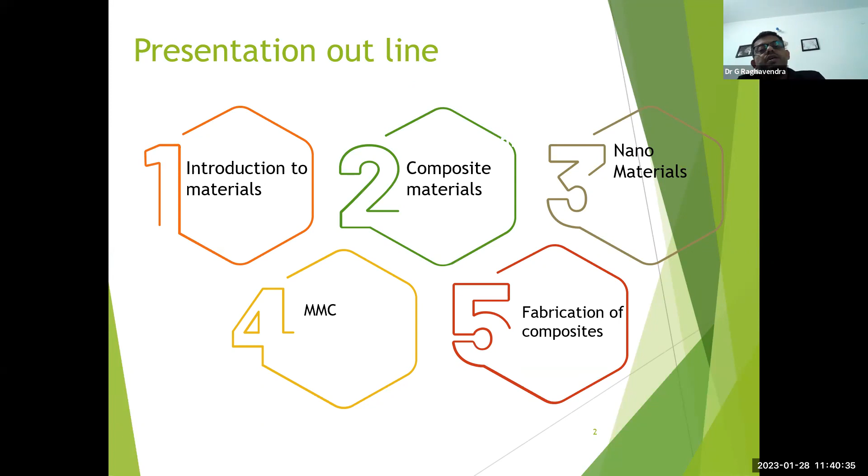So today's topic is about introduction to nanomaterials, nanometal matrix composites. My presentation outlines are: introduction to materials, first we'll talk about the different kinds of materials available, then composite materials, nanomaterials and MMCs - metal matrix composites - and the fabrications related to metal matrix composites.

So coming to materials, the classification starts with engineering materials. People learn or know more about engineering materials, but the basic classification starts with man-made materials and natural materials.

The materials which are available in nature are called natural materials, like stones, bones, skins, wood material, mud and clay materials. These are available in nature, so these materials are called natural materials.

The man-made materials, prepared by man, are polymers, ceramics and metals. From metals, we have alloys and refined ores and other materials. From polymers, we have plastics, thermosets, and thermoplastics, and some classification of polymers and elastomers. Ceramics also have sub-classifications, and metals have sub-classifications based upon alloys and combinations.

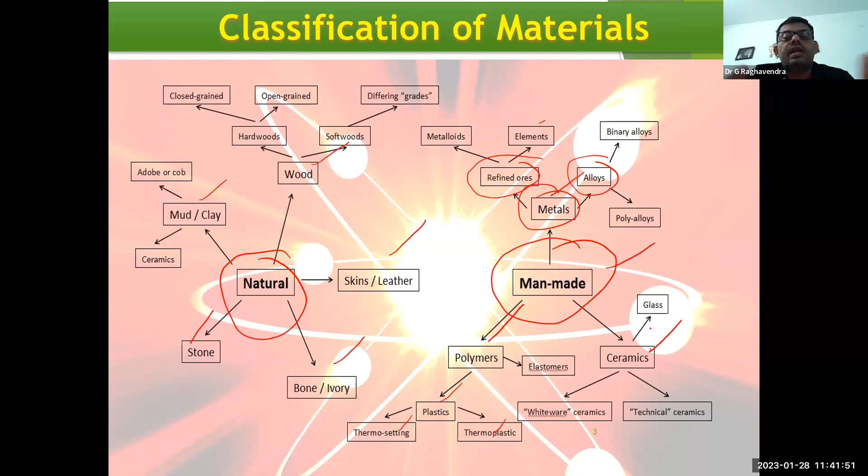So the basic classification of material starts with natural and man-made materials. Coming to engineering materials, which everyone already learned about, it consists of metals - ferrous and non-ferrous, amorphous - with sub-classifications. I'm not going deep into particular materials as our topic is about metal matrix. Quickly I'll complete this: plastics, thermoplastics, thermosets, elastomers, ceramics and others, and particularly composites.

The metals and plastics combinations, and metals and ceramic combinations, give you composites. The reinforced plastics, metal matrix and ceramic matrix, laminates and others. So this combination of metals and plastics, metals and ceramics, and plastics gives you a composite. These are about the engineering materials.

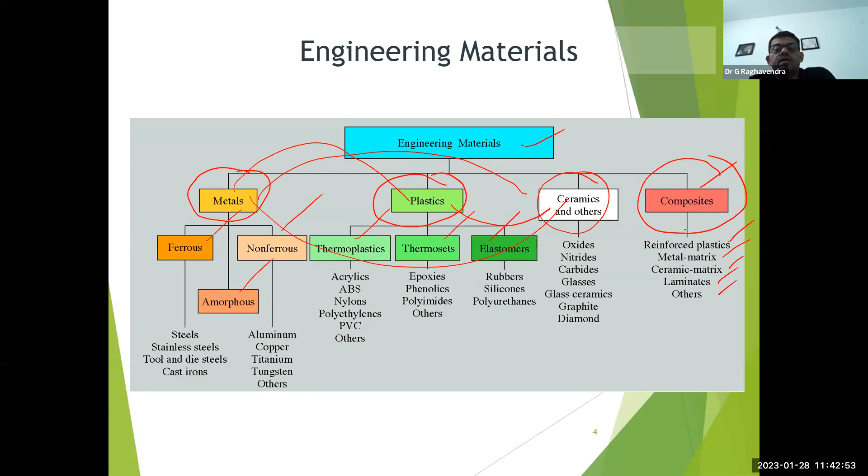There is an evolution of materials through the ages. If you see in the chart, from 10,000 BC, few materials started there, for example gold. From 10,000 BC we have gold, and from 5,000 BC we have copper, bronze, iron, cast iron and steels. You can see the metals flowing from 10,000 BC to the present trend.

So now we have metal matrix composites and advanced materials, functional materials, smart materials - all under metals. When it comes to polymers, from 10,000 BC we have wood, skins, fibers, and different kinds of glues. Now we have polymers like thermosets and thermoplastics.

From ancient times, these composites are not a new material - from ancient times we have them, but especially not metal matrix composites. In ancient times we had construction applications - people developed mud straw bricks and papers. So all those come under composites.

The evolution even from 10,000 BC shows we have composites. Those composites nowadays we more popularly call metal matrix, ceramic matrix, polymer matrix - so all those composites we have. From ancient times we have different kinds of ceramics for high temperature applications. This is the evolution of materials from 10,000 BC to the present trend.

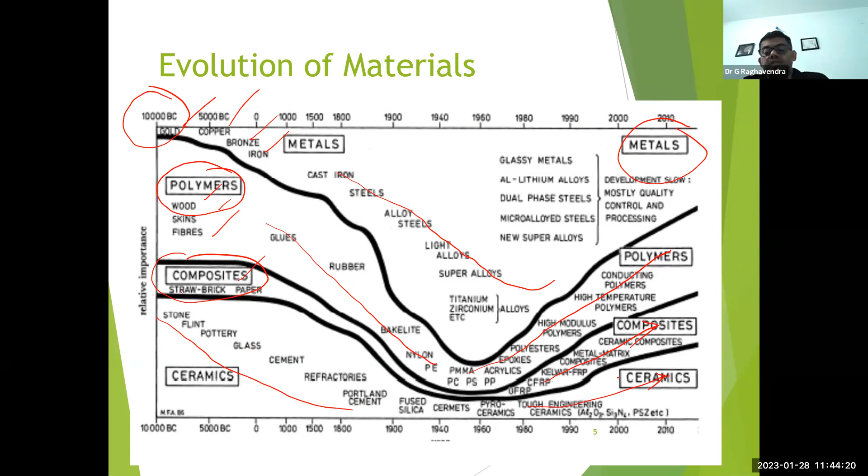Particularly, why do we need these composite materials? What are the needs for advancement, and why do we particularly need composite materials? We already have metals, already have polymers, already have ceramics. Why do we need to develop these composites by combining metals and ceramics, or metals and polymers, or polymers and ceramics? These are the reasons - we require strength.

Strengths are already available, but to enhance the strength of materials we need to go for composites. We need stiffness, toughness, corrosion resistance, wear resistance, and reduced weight. How to reduce it? For a material directly, we can't reduce the weight of the material - we can't straight away reduce the density of that material. By combining materials, we can reduce weight and increase fatigue life, thermal and electrical conductivities.

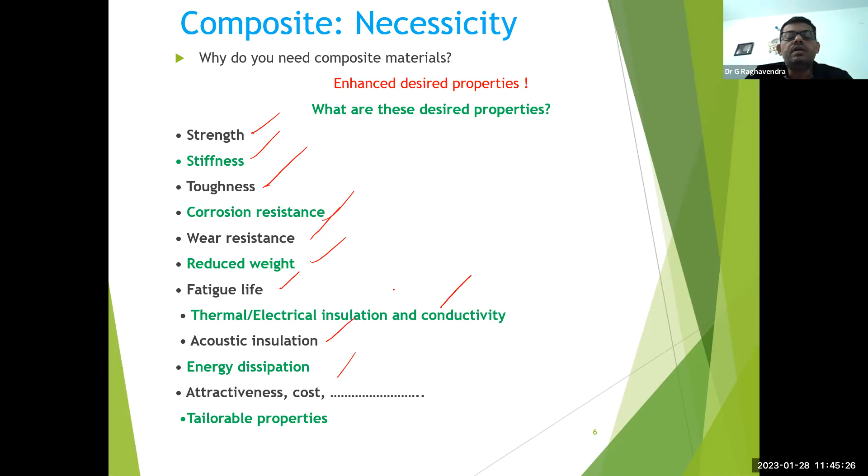So these are the properties which are needed to develop a new kind of composite materials. Coming to the definition of composites, composites are the combination of two or more materials at a macroscopic scale. When we combine two or more materials, they act as a single material after combination, but they don't lose their original properties.

What is the difference between an alloy and a composite? In an alloy also we are combining two or more metals. Why do we call that an alloy, and why a composite? In a composite, we combine two or more materials, but they don't lose their original properties. Those base materials remain the same and don't lose their original properties. In an alloy, when we combine two or more metals, the base materials lose their original properties and form a new material with new properties. We can't easily separate the two base materials from the alloy. So that's the basic difference between an alloy and a composite.

When it comes to composite, we have reinforcements and a matrix. There are two phases in a composite: a reinforcement phase and a matrix phase. Together they give you a composite. Examples of these are mud straw bricks, concrete, and glass fibers. There are many applications, a few are quoted here.

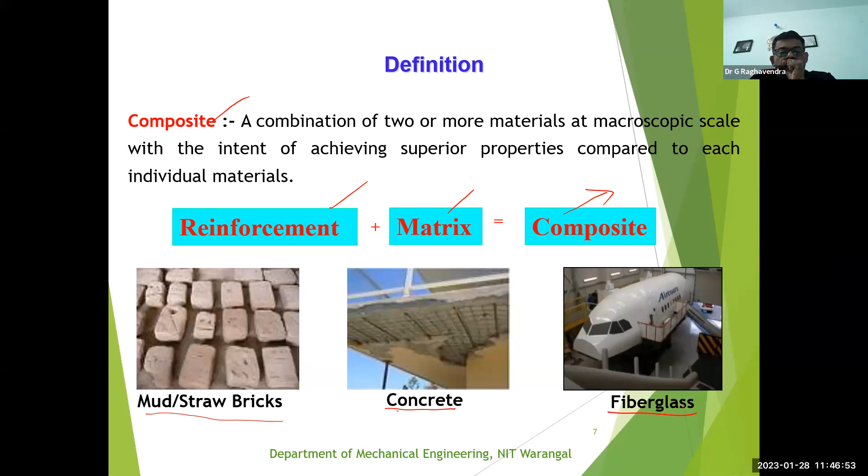So coming to the phases, what is a matrix and what is a reinforcement? The matrix phase is made up of metals, polymers, and ceramics. We can use any of these as matrix materials. This is a continuous phase, and it particularly binds the fibers.

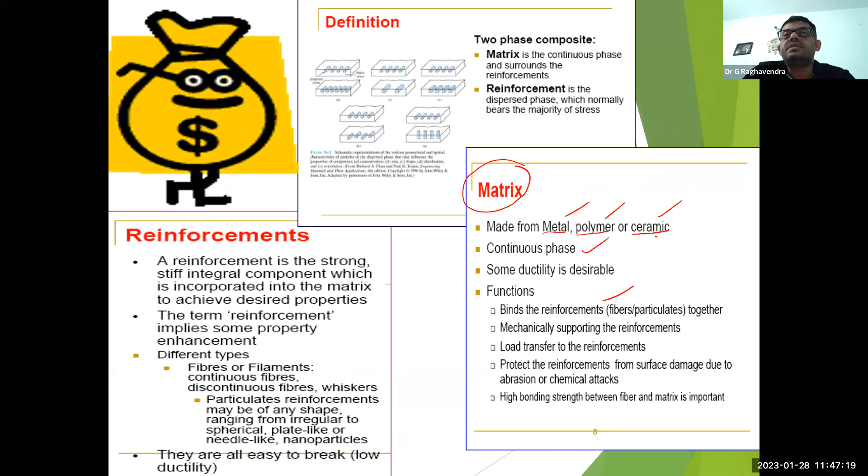The matrix transfers the load. It mechanically supports the reinforcements, transferring load to the fibers, that is, to the reinforcements. Whether it is a metal, polymer, or ceramic, its purpose is always to support the reinforcements and transfer load from one fiber to another through mechanical support. So the entire strength or load transfer from one fiber to another happens through this matrix, which fully covers the entire reinforcements. These are a few properties of the matrix materials.

When it comes to reinforcements, the reinforcement is a stronger material. The load applied on the composite is entirely carried by the reinforcements. This can be a continuous phase or a particle phase. The entire load applied to the composite is carried by the reinforcements. So this is the main important material which carries the load, and the strength of the composite is decided by these reinforcements. These are a few properties of the matrix and reinforcements.

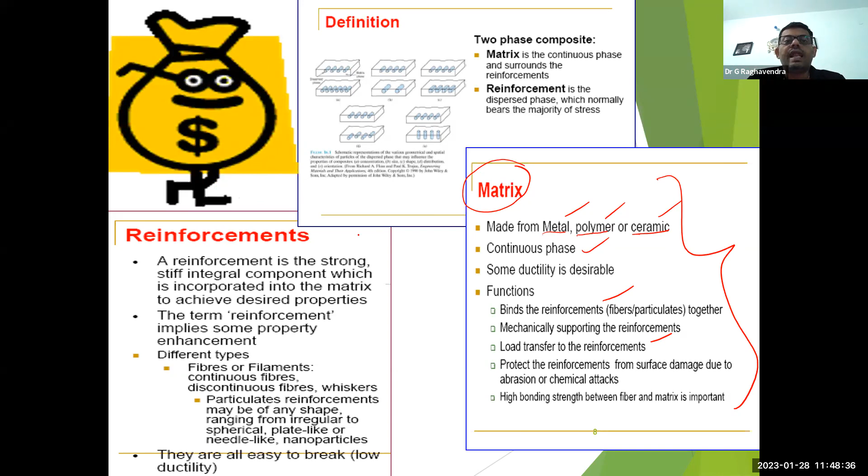We'll see the classification of matrix. First is the metal matrix, the main topic of today. What kind of fibers can we add? We can add boron, carbon, graphite, alumina, silicon carbide, and other materials as fibers into the metals. We can use different kinds of metals like aluminum, magnesium, titanium, copper as the matrix, and add different kinds of reinforcements into them. These fibers improve temperature resistance, temperature creep, thermal expansion coefficients, tribological properties, and mechanical properties. So to enhance the properties of these metals, we add different kinds of fibers into the matrix.

Coming to the polymers, we have thermosets and thermoplastics. I won't go deep into thermoplastics and thermosets here, since we're talking more about metals. Polymers are lighter weight materials compared to metals, which is advantageous not in terms of strength, but in terms of density, lightweight, and flexibility in manufacturing. There are a few disadvantages compared to metals: they won't give high strength like metals. Polymers give less strength and are weaker materials compared to ceramics and metals.

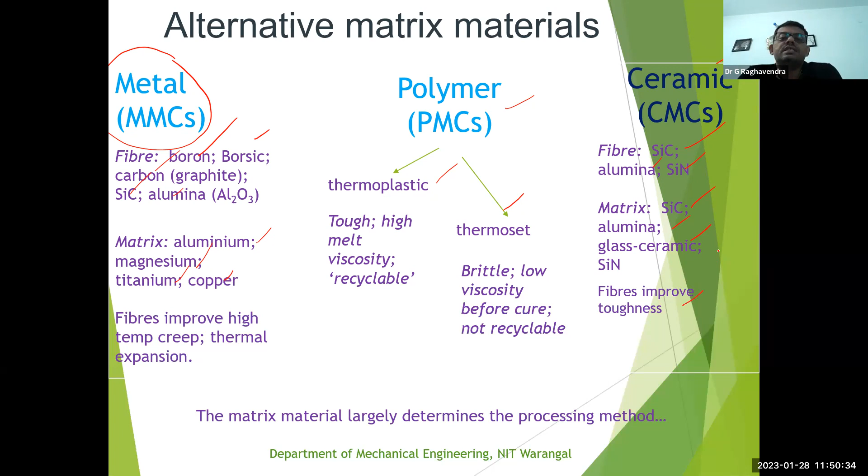In a matrix, we can use the same kind of alumina, silicon carbide, and so-called ceramic composites. Ceramics as fillers and ceramics as reinforcements improve toughness and some other related properties. This is a general classification of matrix materials.

Quickly, we'll see the different kinds of reinforcements we can add into a composite. We can add particulate composites—particles can be added, whether the matrix is a metal, polymer, or ceramic, to enhance the properties. Sometimes it's used to enhance the properties, sometimes to decrease them, depending upon the application.

So with particle composites, and coming to fibers and whiskers, we have unidirectional discontinuous fibers, where the entire composite has fibers added in one direction. There's also random oriented, where we are not focusing on any particular direction—we add particles, fibers, or flakes randomly. This is called random oriented discontinuous fiber composites. Preferably, in unidirectional fibers, you can see all the fibers added in one direction continuously from one plate to another, so called unidirectional continuous fiber composites.

If you apply a load in the direction of the fibers, you get high strength. If you apply a load in the other direction where there are no fibers, the strength will be much weaker. That's why people developed cross-ply composites—in both directions we have fibers, so whichever direction the load is applied, we have strength.

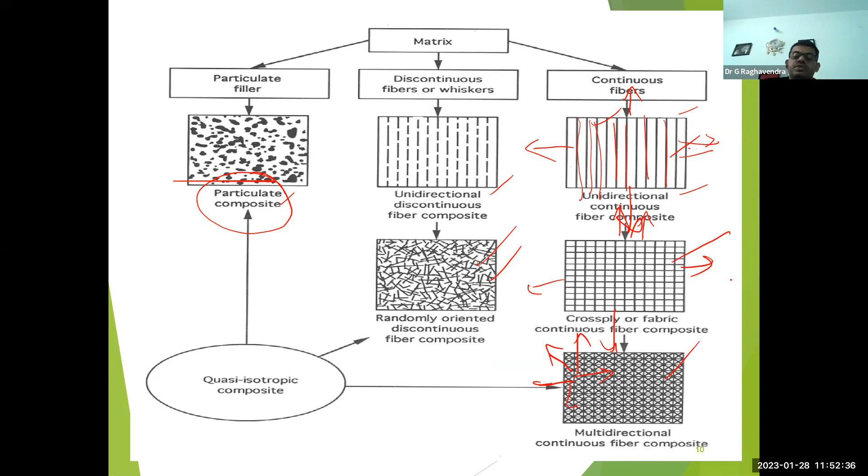So this is about reinforcements. Now coming to the phase called filler composites—when we add fillers particularly to a composite, we call it filler composites. Here we have micro fillers as well as nano fillers. Today we'll talk about nano filler composites.

Before that, we'll see some examples like metal powders. Metal powders can be used as fillers—aluminum, carbon, magnesium, titanium dioxide, zirconium dioxide. These are a few metallic powders available in terms of fillers, which can be added to metal matrix composites based on their melting points, allowing us to develop new kinds of composites.

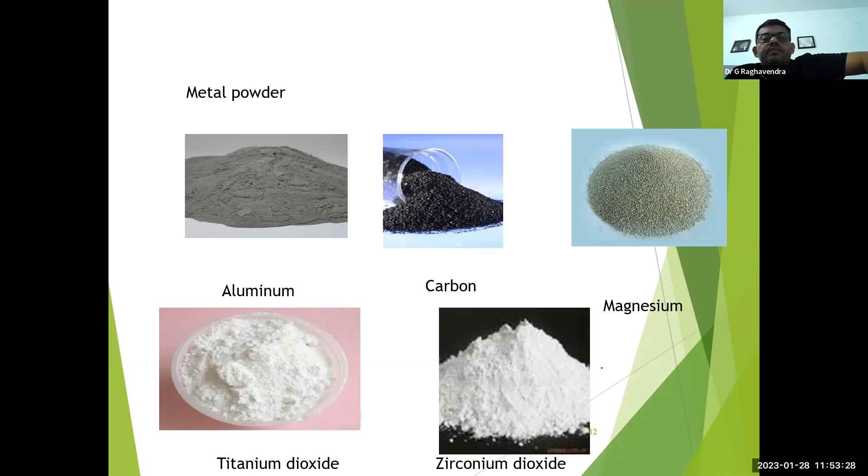Since the topic is about nano composites, I'm not talking about the micro level. Micro composites means the particle size is at a micro level, then we call it micro composites. If the particles are at a nano level, we call it nano composites. Mathematically, nano means 10 to the power of -9.

We already know composites as a combination of a matrix and a reinforcement. So what are nano composites? In the name itself, 10 to the power of -9 composites means the material which we can't see with our eyes. So what is that particular composite? The definition is: nano composites means any one phase will be at a nano level, in any one dimension—whether the reinforcements are particles added into the composite. If any one dimension of these reinforcements, not the entire particle, is at a nano level, then we call it a nano composite. It's not that the whole composite is 10 to the power of -9; rather, any one phase, in one dimension, is at a nano level, and then we call it a nano composite.

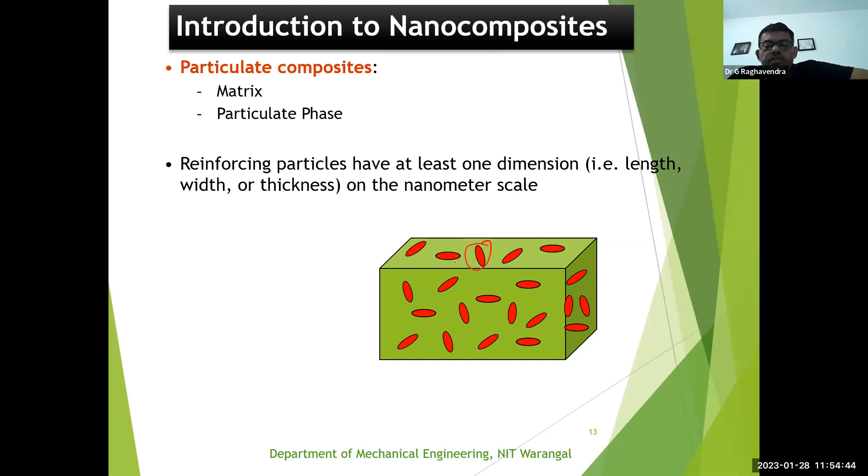So first we'll see what nano is. There's a small comparison—this is a long-standing comparison involving the largest star, where we compared the sizes. As there's a time constraint, I won't go deep into all of that.

As you can see on the screen, this is compared at almost 1,900 times the sun's diameter, 342 times the earth's diameter compared to the sun, and a small child of 1 meter height. This shows the distance, how many times bigger one is than the other.

At the macro level, we have a penny coin which is 2 centimeters, a raindrop at 1 mm, and hair diameter, the smallest size we can see with our eyes. Not hair length, hair diameter. The diameter of the hair is almost 100 microns, which is the smallest size we can see with our eyes. After this 100 micron threshold, we need extra components to see smaller sizes. For example, red blood cells we can see in bulk, but as a single cell we can't, because at 5 microns it's too small to see.

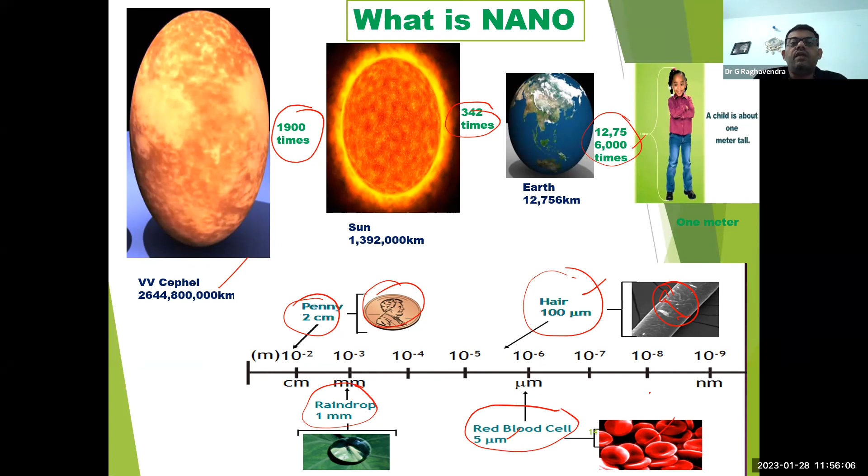We can see these sizes only with the help of a microscope, by magnifying them. Now we enter into a nano zone, where we can't see with our direct eyes. We need certain components to see these particular sizes.

For example, the bacteriophage is about 60 to 70 nanometers. Gold particles as nanoclay are almost 13 to 50 nanometers. DNA is 2 nanometers, the smallest size in the entire world, compared with the Earth's diameter, that is like 12,756 into 10 to the power of 12 times bigger.

So to understand the size of a material, we need to compare it with larger materials, so we can understand what is the smallest size of it. Because when we are magnifying a particle, we don't truly understand its size. When we are cutting into lower levels, going into the nano levels, we need to see how the particle size is affecting things. Now we have seen what the smallest particle sizes are.

We already know from the recent pandemic that the bacterial and flu virus phase particle size is almost 100 nanometers. You can imagine what that particular size of material is doing.

Now we'll look at terms like zero dimensional, one dimensional, and so on, based on the three dimensions: length, breadth, thickness. If all three are in the nano level, we call it zero dimensional nanomaterials, the solid nanoparticles. One dimensional means only one dimension is not in the nano phase, like nanorods, where the length is not nano but thickness and width are in the nano phase. Two dimensional means two dimensions are not in the nano phase, the length and width, but the thickness is in the nano phase, that is films and sheets. Three dimensional means no material dimension is in the nano phase.

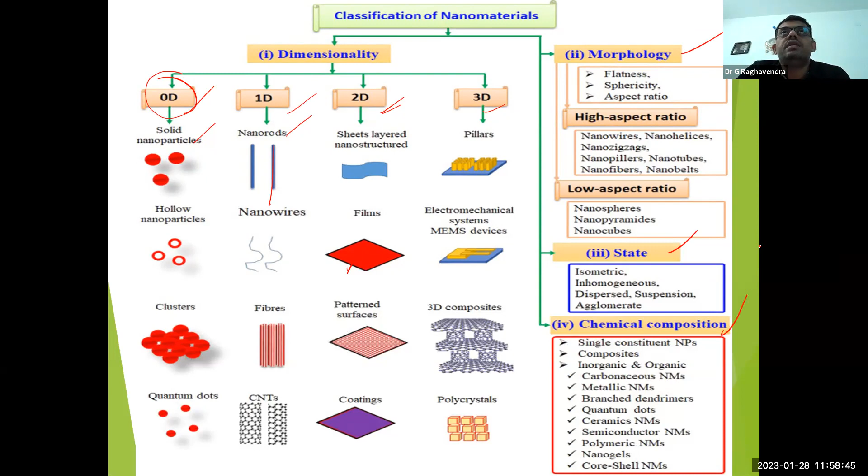I'm not going deeper into nanotechnology here. If you're interested, you can explore the different kinds of nanomaterials, how they are differentiated, and their classification based on particle size, dimensionality, morphology, state, and chemical composition, and how these nanomaterials are modified and developed. Since we are talking about metal matrix composites, I'm skipping ahead. Based on morphology we have one classification, based on state of the materials another classification, and based on chemical composition, the combination of different materials, we get different kinds of nanomaterials.

Now let's talk about the advantages, why we need to study these nanomaterials, nanocomposites, and nanometal matrix composites. To understand the advantage, let's take one small cube.

I'm taking a small cube with a side of 5 centimeters, and the height and width are the same, 5 centimeters. The area of this square face is 5 into 5. Since it's a cube with 6 faces, it's 5 into 5 into 6, which totals 150. So the total surface area of this cube is 150.